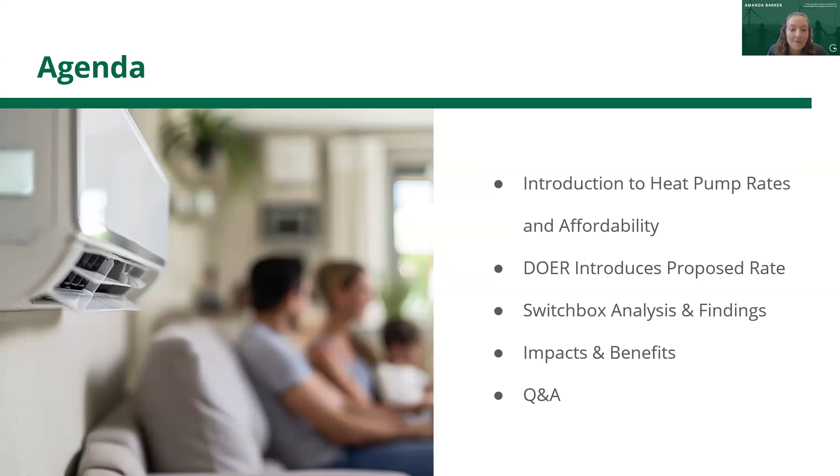Today's guest speakers include Jolette Westbrook, Director and Senior Attorney of Regulatory Solutions at the Environmental Defense Fund; Austin Dawson, Deputy Director of Energy Supply and Rates at the Massachusetts Department of Energy Resources; Juan Pablo Velez, Executive Director at Switchbox; Amanda Sachs, Policy Associate at Rewiring America; and last but not least, Kyle Murray, Director of State Programs at the Acadia Center.

So without further ado, I will hand it off to Jolette to get us started. Thank you, Amanda, and hi, everyone. I am Jolette Westbrook with the Environmental Defense Fund. The Environmental Defense Fund is a nonprofit worldwide organization striving for maximum impact to ensure a clean energy transition, healthy communities, and the ability of people and nature to thrive.

So I will tee up the discussion by giving my general perspectives as to why the report by Switchbox is so important. You will then hear from other speakers who will talk about the specifics of the report.

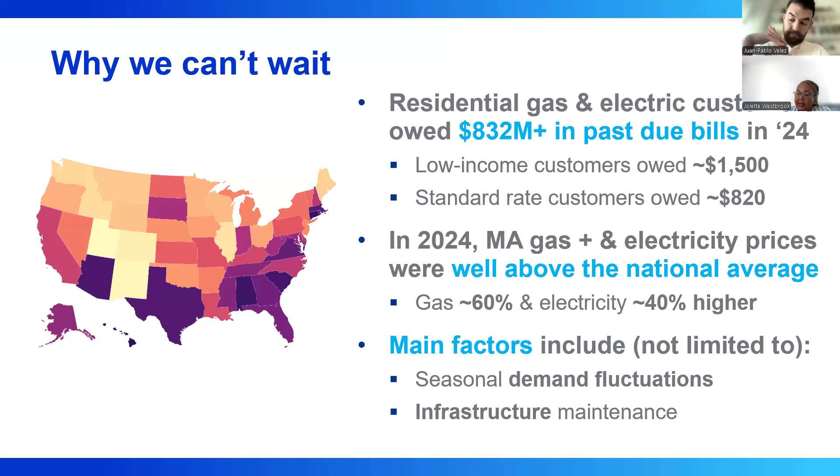So what can we do? We have to eliminate the barriers to heat pump adoption. That is one key thing we can do now. And how do we do that? Well, one way is to get to the bottom of the hard questions.

I think the report by Switchbox addresses some of those hard questions. We also need to make sure that the heat pump rates work in tandem with other low and moderate discount rates, and that mechanisms are put in place to ensure access to heat pumps. All customers need to have access to heat pumps.

We also need to make sure that we educate customers regarding heat pumps and their benefits. We need to ensure that there are coordinated and effective education measures.

I will note that in New York, EDF found that only 1%, let that sink in for a second, 1% of heat pump adopters are enrolled in the utility rate designed to save them money. That left $131 million in bill savings unrealized.

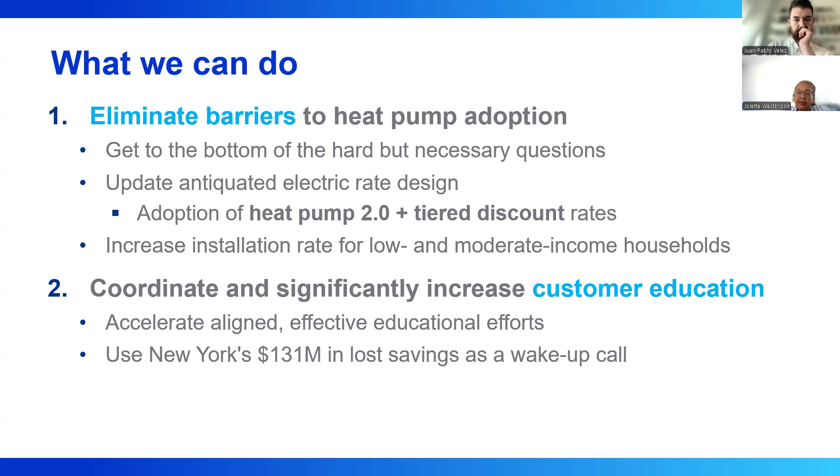Next slide, please. Massachusetts can certainly learn from the example in New York, and we can make sure that we have coordinated messaging. We need to start with the basics.

What is a heat pump? What type of heat pump would be most beneficial for a particular situation? Why should I install a heat pump? How can I afford to install a heat pump?

We must have the information available so people know the incentives that they can use, and we must all give the same message. It is so confusing if we are not on the same page.

If advocates have a different message from utilities, or utilities have a different message from advocates, or advocates have a different message from policymakers, etc. There is some basic messaging that we all should be using to help customers understand what is at stake and how they can save with heat pump rates, and how they can improve health benefits and environmental benefits by using heat pumps.

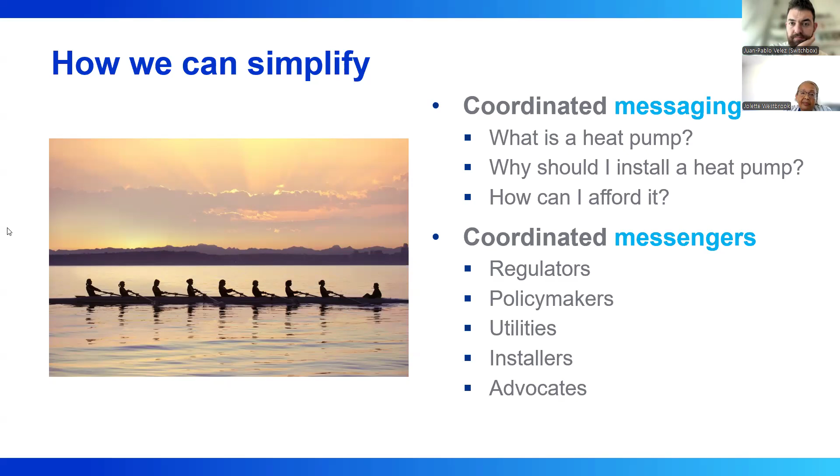Next slide, please. So to determine the next steps, I think it's important that we look at what we know.

The Switchbox report identifies significant 2.0 rate cost savings. We know that Massachusetts customers need rate relief. And the report demonstrates that heat pumps are a smart financial move for most homeowners. I do want to emphasize this includes low and moderate income customers. And as I indicated before, heat pumps provide health and environmental benefits.

Next slide, please. So we have a big decision to make in Massachusetts. We have facts. We need to rely on those facts and urge the decision makers to make the right decision and adopt the 2.0 heat pump rate that will benefit homeowners in Massachusetts.

So next, I will stop there and we'll turn it over to Austin.

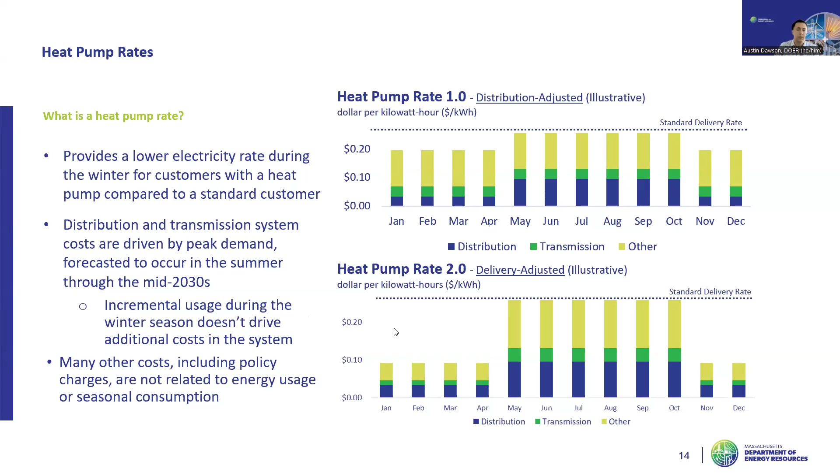To implement those recommendations, DOER requested the DPU open an investigation on heat pump rates and adopt heat pump rate 2.0s, meaning Unitil and National Grid would need to evolve from their current heat pump rate 1.0s, and direct Eversource to file a heat pump rate for review. The DPU directed Eversource to file a proposed heat pump rate, which has been submitted and is awaiting a final decision. Simultaneously, the DPU has opened an investigation into whether all EDCs should implement these heat pump rate 2.0s, as we're discussing today. We're currently waiting on next steps following a public comment period.

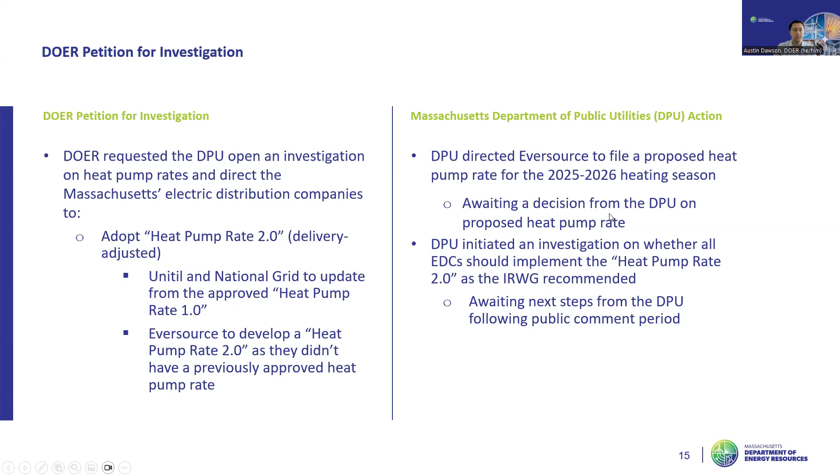Thank you for your time and for having me here to speak about the role that DOER and the Interagency Rates Working Group has played. I'll pass it on to Juan Pablo from Switchbox to share more about their research and findings.

Hi everybody, Juan Pablo Velez from Switchbox here. We're a nonprofit research group that helps advocates run the numbers on policies like these heat pump rates. Austin just introduced what the rates are. Essentially, if you have a heat pump, and only if you have a heat pump, we will charge you less during the winter for the poles and wires, not for the electricity you consume, just for the grid. That's the 1.0 rates.

DOER is proposing to go further. What we'll see in this presentation is why that's justified, and if the DPU goes further, what will that do to energy affordability in Massachusetts. That's what we're about to see.

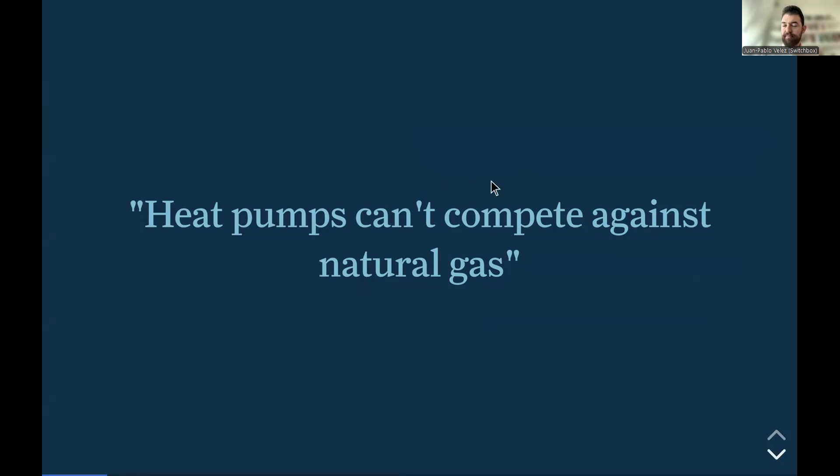I'm going to frame this whole talk in terms of some conventional wisdom you'll hear out there in Massachusetts, and frankly in all cold states, about heat pumps. You'll often hear that heat pumps just can't compete against natural gas. The first thing we did in this research was check if this was true. Turns out it is in fact true.

About 27% of all the households in Massachusetts heated by natural gas—which is not all of them, about half—their bills go down after they get heat pumps. So you take out your gas furnace or boiler, get heat pumps, and in about a quarter of cases your bills are lower afterward for the whole winter, which is what we want to see. But about 43% of the time they go up, and 30% of the time they go up more than $1,000 over the whole heating season, which works out to over $100 a month, which is not so good.

So this is our visualization showing it is in fact true that it's only advantageous, it only cuts your heating bills about a quarter of the time if you're on natural gas. That's under the current electric and gas rates, the default ones. I'm pointing that out because it'll become important in a little bit.

Let's look at a second commonly held belief, which is that there's already high energy burdens for low-income folks. Energy burden just means you're paying too much of your income for energy, and that heat pumps will make that worse. So let's check if that's true. Turns out it's false. The way affordability is commonly measured by policymakers is this concept of an energy burden. If a household is above this line, it means they're paying more than 6% of their annual income on heating bills. If they're below the line, they're paying less than 6%. So let's see where we are currently.

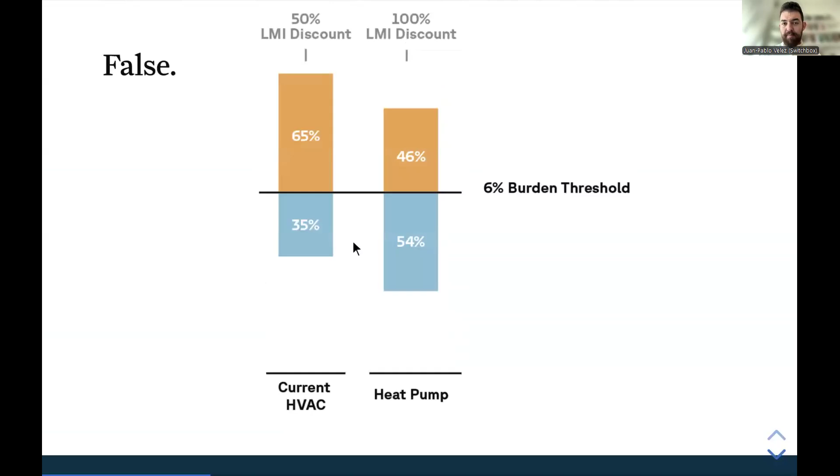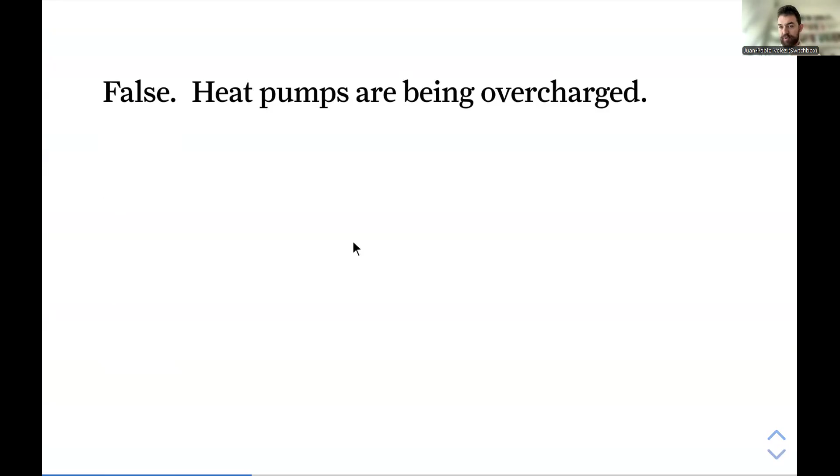The third thing you hear is, hey, all these bad outcomes are because natural gas is really cheap, cheaper than electricity. And that's false. If you take away one thing from this presentation, it's that heat pumps are currently being overcharged. So we're about to walk through what that means.

This is the typical bill across all households in the state, given whatever HVAC they currently have, this is how much they're paying on average for their electric bill. They're paying about $880 on average for supply, just for the electrons, and another about $1,000 for delivery. This is their share of the payments for the grid that bring those electrons to the building. This is just for the winter.

Now here's what happens when that average household gets a heat pump. They're consuming about twice as much electricity, that's the orange part, it gets twice as big, and that makes sense. They're consuming more electricity, so they should pay for more electricity. But they're also paying twice as much for the grid, and that doesn't necessarily make sense, because right now in winter, the grid is only at 80% capacity.

It's built for the hottest days of summer when everybody's running their one-way heat pumps, also known as air conditioners, and most folks don't have electric heating. So in winter, there's a lot of spare capacity on the grid, and we're charging folks as though there wasn't. We're saying, hey, if you use that spare capacity, we're going to double how much you have to pay for the poles and wires. So that's the delivery charge doubling.

And this doesn't necessarily make sense, when you do that, you actually push down everybody else's payments. So when we say heat pump customers are subsidizing everybody else, and therefore they're being overcharged, this is why it happens. Let's say you have a typical block here.

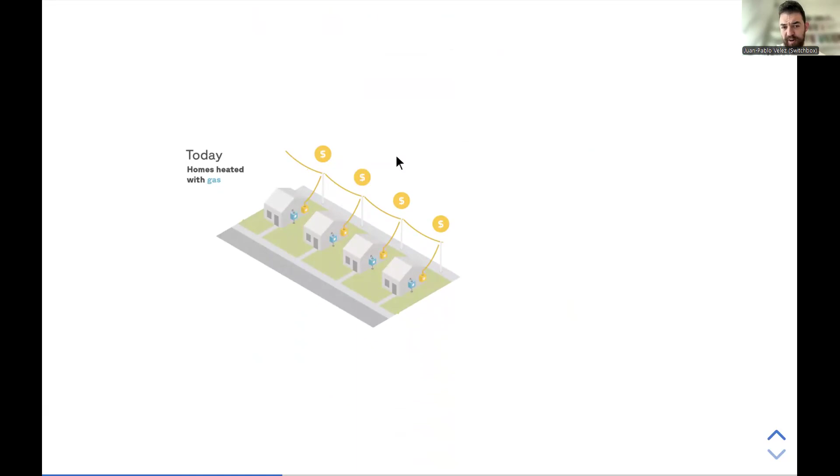It's heated by natural gas, every home is heated by natural gas, those are the little blue gas meters, and then they all have an electric connection. In this contrived example, they're all paying the exact same amount, they're all consuming the same amount of electricity, so they're all paying the same amount for the poles and wires. Let's say they're covering the cost of these poles and wires you see here, and they're splitting it evenly.

They each cover a piece of those costs because the utility upgraded this feeder in the past few years. They're still paying back the banks for it, and so we're helping them pay it back, essentially.

Now keep your eye on the little house that turns orange. It swaps out the gas for a heat pump, and when it does that, it ends up consuming twice as much electricity, and so it pays twice as much for the poles and wires. But because...

there's no need to upgrade the grid, check out what happens to the payments there. That extra payment ends up squeezing down everybody else's payments because it's a fixed cost. We're just paying back the grid we already have. That's why a subsidy occurs.

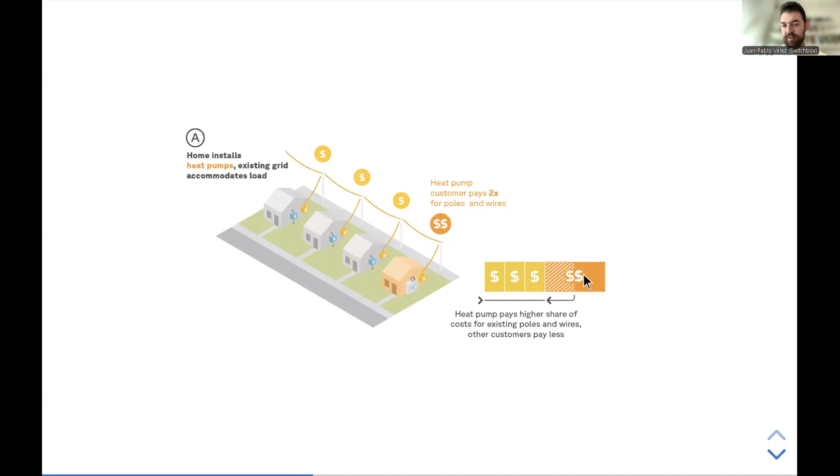So what if we fix this overcharge? What would that look like? Well, it would look exactly like the rates that DOER is proposing. So this is our bill, our typical bill post installing air source heat pumps again. The 1.0 rates that the DPU has already ordered the utilities to go ahead and do lowers the total bill by about 12%, which is a good start.

But if you actually try to make the delivery charge, the little light blue box, roughly the same size as it was before people electrified, so they're not paying more for poles and wires, then you would discount it by 23% on average. That's what happens to the typical bill under those 2.0 rates that DOER is asking the DPU to enact.

And Kyle Murray from Acadia will have more to say about this in a bit. So that's what would happen to the typical bill. And then if you apply that across everybody on natural gas, here's what happens now after people get heat pumps.

So this is what we are at today. As I said, only 27% of folks have their bills go down. Under the 1.0 rates, it goes to 50%. And under the 2.0 rates, it goes to 74%. Today, only 1 in 4 would have their bills go down with heat pumps when they move from natural gas. Under the 2.0 rates, it would be 3 out of 4.

And it wouldn't cost anybody anything because you're just not charging them. Right now, the reason that heat pumps can't compete is because you are charging people too much for the poles and wires. If you charge them the same amount as they would before, then it turns out that heat pumps can actually compete. So when you hear that heat pumps can't compete with natural gas because gas is cheap, that's not the main reason. The main reason is we are overcharging heat pump owners for poles and wires.

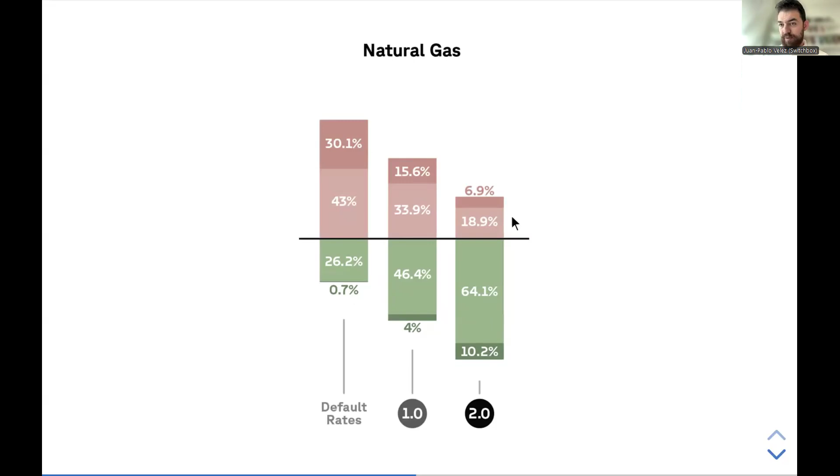And if you do that, look what happens. It flips, and in most cases, people save money. But of course, natural gas only heats about half the homes in the state. The rest are delivered fuels and electric resistance. So if you add those in...

today you would already have 45% of folks saving money with heat pumps, and it goes to 82% under 2.0 rates, because anybody who has an electric utility and a heat pump can use these rates even if they're not consuming natural gas. So the big banner finding from our study is: if you make heat pump rates fair, then 82% of households can save with heat pumps.

What about LMI burdens? Let's revisit the findings we had before. We found out that if you apply the discount to heat pumps, you can get about 50-50, a little over half of folks, under that critical burden threshold.

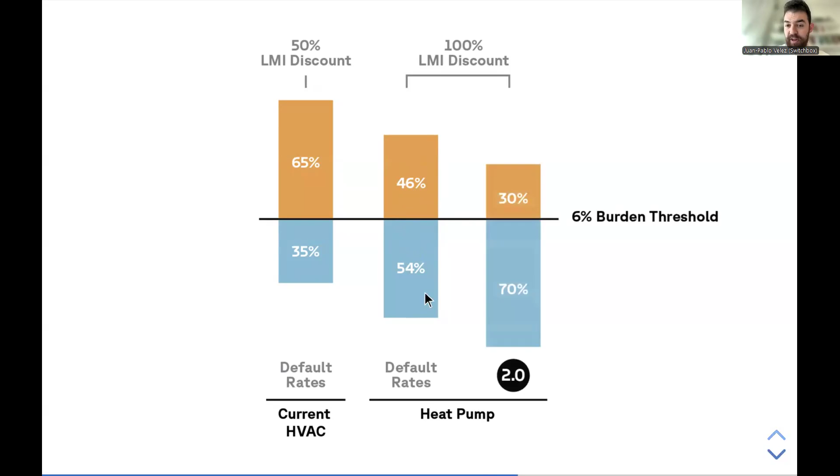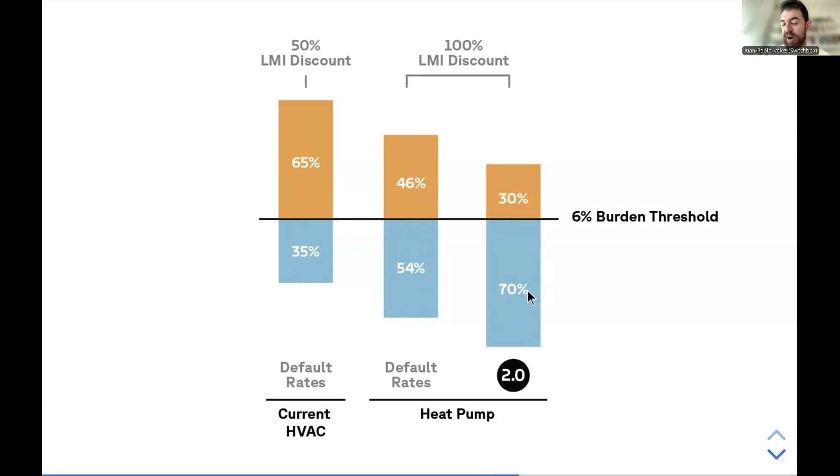What about if we add 2.0 rates on top? You get 70% of all the households that make less than $50,000 a year -- that's what the population is here -- spending less than 6% of their annual income on heating, versus 35% today. So it's a gigantic change, and probably one of the most significant ways that energy affordability could be addressed in the state of Massachusetts.

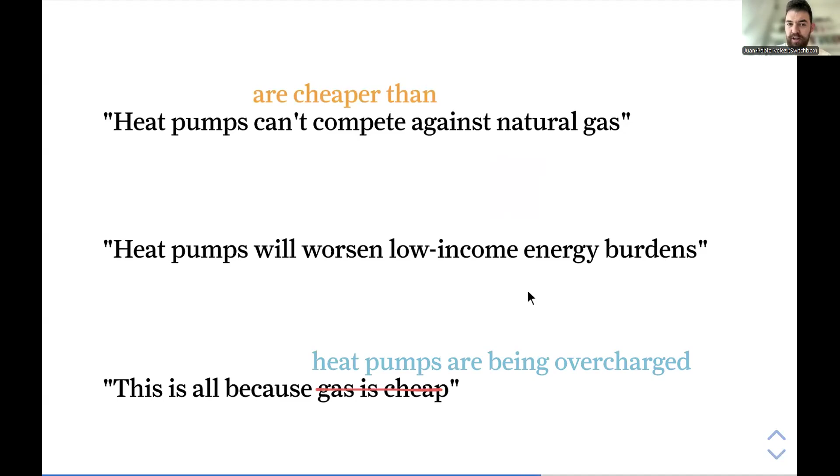So let's revisit our commonly held beliefs: heat pumps can't compete against natural gas, and heat pumps will worsen low-income energy burdens, and this is all because gas is cheap. As we learned, it's not because gas is cheap. It's because heat pumps are being overcharged. If you fix that overcharge, then heat pumps will be able to compete -- in fact, they'll be cheaper than natural gas for most households.

You go from 45% of households saving to 82%. And heat pumps will improve low-income burdens from 65% of households paying more than the amount we want them to for just their heating bills -- never mind all their other energy bills -- and that gets cut more than in half, to 30%.

Hi everybody, I'm Amanda Sachs. I work with Rewiring America. We are a leading national home electrification nonprofit, and I lead our policy work in the Northeast. I want to give you some thoughts on why the Massachusetts Heat Pump Rate 2.0 is important beyond the Commonwealth.

First, the regional view. The major investor-owned utilities in Massachusetts—Eversource, National Grid, and Unitil—also operate in other northeastern states. Eversource operates in Connecticut and New Hampshire. National Grid also serves New York, and Unitil is active in New Hampshire and Maine. By exporting the 2.0 rate model, these utilities can apply consistent, scalable strategies across their service areas. They'll get better load predictability, avoid infrastructure strain, and meet rising regulatory expectations on decarbonization and equity.

Very quickly, why does this matter in a climate context? Why do we push for heat pumps and heat pump rates? Scaling heat pump adoption could reduce residential building emissions by 36 to 64%, but that only happens if operating a heat pump is affordable, and that's where this rate design plays its central role.

Heat pump rates are a proven tool that states are barely using. Most utility rate structures still penalize electrification, especially for low-income households, due to high per kilowatt hour delivery charges, like Juan Pablo was just saying. But Massachusetts is proving it doesn't have to be that way. We want to spread awareness of how helpful and common sense this policy is. The 2.0 heat pump rate design is repeatable across other cold climate states with similar energy needs, building stock, and emission goals. Today, 88 utilities across the US offer some form of electrified heating rates, but these are mostly municipal or co-op providers. Only 1 in 5 households lives in a territory with access to those electrified heating rates, and only 12 of them are tailored specifically for heat pumps. The rest are for electric resistance as well, which are pretty energy intensive machines.

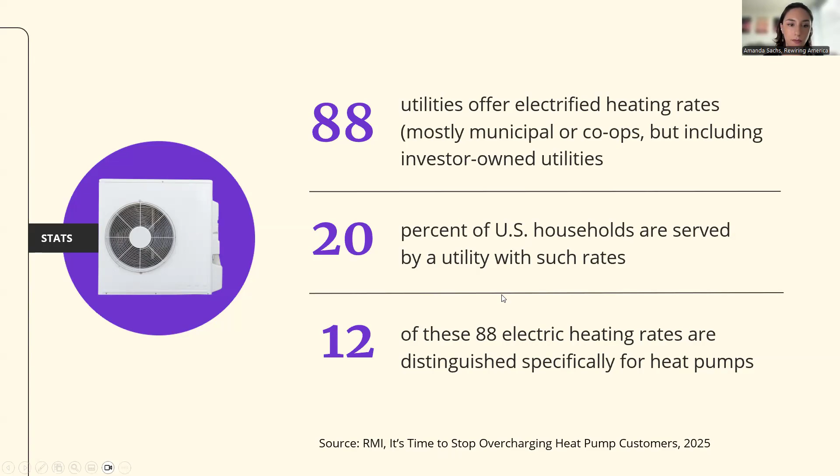Only 16% of US homes use heat pumps today. To meet our national climate goals, that figure needs to triple by 2032. Upfront rebates on heat pumps are important, but they are not enough. If the monthly bill goes up, adoption will stall. Rate reform ensures that people stay with their heat pumps after installation and are happy with their machines. Massachusetts is offering more than a pilot—it's offering a playbook that can be copied by both the investor-owned utilities implementing the rate in Massachusetts and by legislatures, regulators, and advocates pushing for it in other cold climate states.

The next slide is just my contact info. I look forward to your questions, and you can always feel free to contact me at amanda@rewiringamerica.org. Thank you, and I'm going to pass it over to Kyle.

Hi everybody, my name is Kyle Murray. I am the Director of State Program Implementation for Acadia Center, and I am here to talk to you about why heat pump rates simply represent fairness in rate making.

Acadia Center's mission is to advance bold, effective, and equitable clean energy solutions for a livable climate and a stronger, more equitable economy. We focus on 6 areas of climate and clean energy within which we prioritize consumer benefits, public health, economic growth, and equitable distribution of benefits.

I don't actually have a ton to my slides, so I just have these 2 slides, and I want to really stress that heat pump rates represent a correction for an error that has been occurring over time—that heat pump owners have been significantly overcharged for their fair share of the distribution costs and for paying for the grid.

A fundamental key to rate making is that ratepayers should only be charged for the costs they incur upon the system. Now, according to the Massachusetts Interagency Rates Working Group, each utility's system is currently summer peaking, so the distribution system is built to serve the capacity of a peak summer day. In the winter, there is available capacity or headroom on the system, meaning utilities are unlikely to incur incremental system costs when usage increases during the winter season in the near term. What does this mean in plain English?

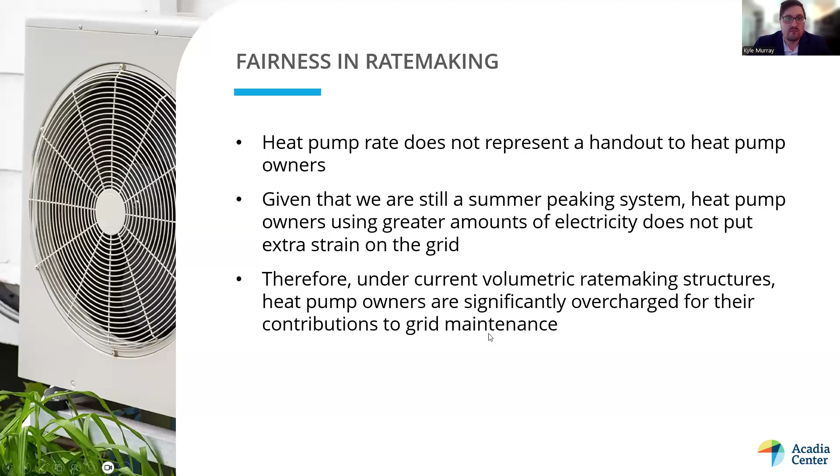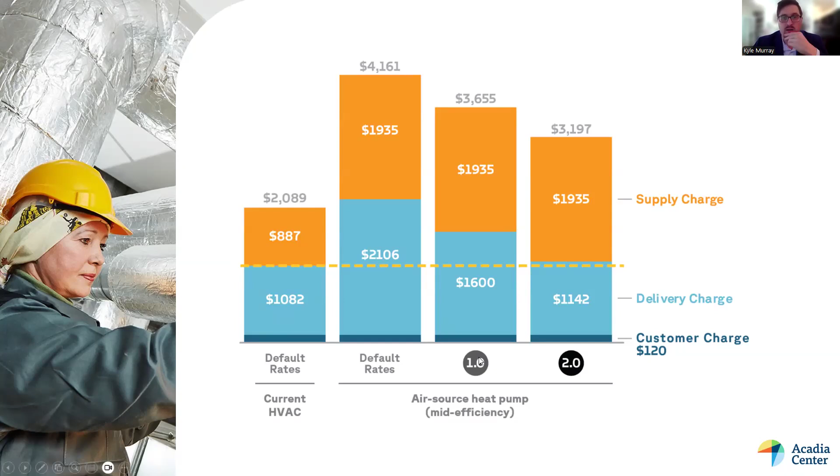Next slide. And again, that's my information, and I believe we're moving on to Q&A right now. Is that correct?